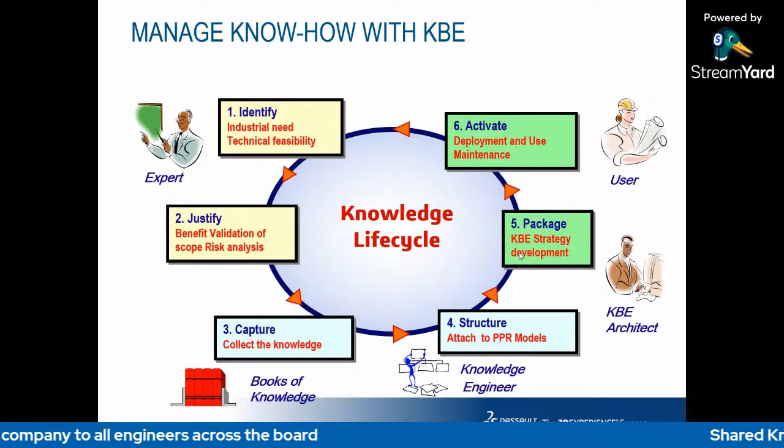Then the next step is to collect the important knowledge from related sources. The knowledge engineer then attaches the know-how to the PPR model and knowledge-based engineering architecture to strategize the development. And then the knowledge or know-how is able to be deployed, used, and maintained depending on the requirements by the company or the customer. Both processes are covered under knowledge-based engineering.

All right, so next, we move to the industry challenges and pains. So these are the typical pains and challenges faced by company or industry.

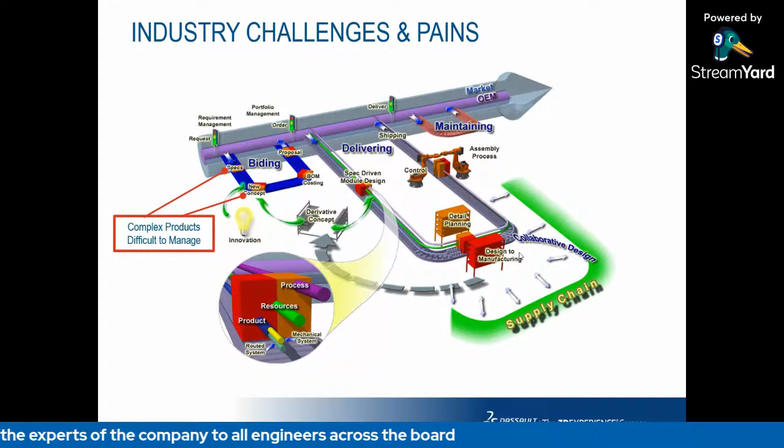Complex products are difficult to manage due to lack of information from suppliers. Then frequent change of requirements from suppliers. And then the necessity to rework the design due to errors and bad working methodology.

Long design time due to non-automated process. Frequent schedule violation due to the bad reactivity of supply chain. The right minimum information to exchange or share with the supplier is not identified internally because of delay due to incompetency of resources.

Low quality products could be due to workers not following the design rule or company policy. And then, last but not least, high maintenance costs because of implicit know-how or lack of competent human resources, badly documented maintenance procedures, and so on.

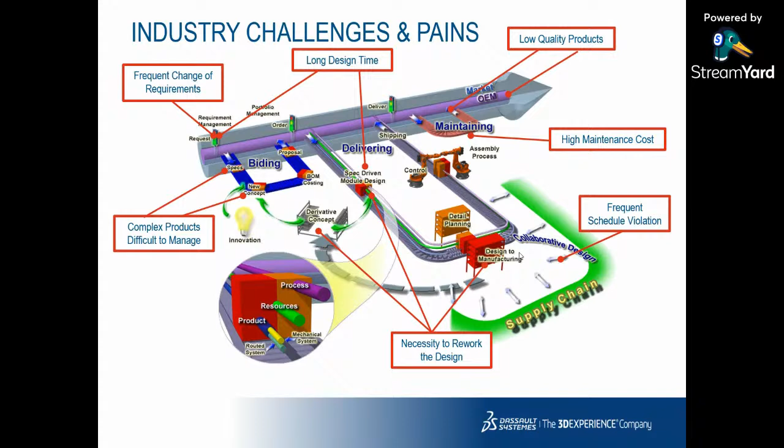All right, so next, knowledge ware values and benefits. So how, in order to cure all the pains just now, the company has to set up an environment favoring innovation and in the meantime automating and increasing the security of low value added tasks.

This will be the result after the know-how automation is implemented in this company. So, complex products difficult to manage: no proliferation of products and process thanks to unified working methodology.

Then frequent change of requirements: capitalized strategic knowledge takes into account explicit and tacit knowledge, then enables reacting quickly to any requirement change. Thanks to PDM links and the associativity of design, the changes are propagated automatically.

Then a necessity to rework the design can be cured by streamlined product development, because working methodology is enforced, so the quality of design is guaranteed.

Long design time: performance is increased because the processes are automatized according to the best methodology. The right knowledge is shared among identified communities, and the products and processes are optimized.

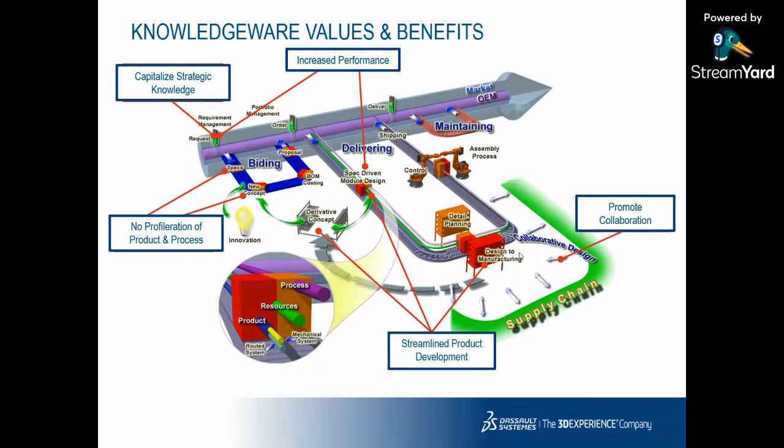Next, frequent schedule violation: the employees and suppliers collaborate on the basis of shared knowledge. They are more satisfied by their work since they have less repetitive tasks.

Then, low quality products is improved since the product variation is well documented and managed as well as the process know-how. The application of the best working methodology is enforced.

High maintenance costs is reduced. The management of knowledge harnesses the collaborative power of the company, and finally stimulates revenue growth. Innovation is sped up.

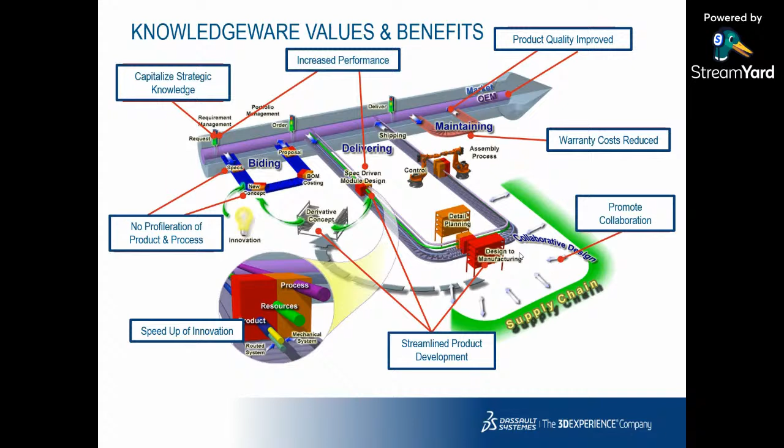Alright, so next, knowledge ware concept. This is basically the package to implement knowledge ware. Knowledge ware workbench in Catia consists of Knowledge Advisor, Knowledge Expert, Product Engineering Optimizer, Product Knowledge Template, and Business Process Knowledge Template.

So the Catia V5 products to capture know-how, for today's webinar, I will be focusing only on two products, which are Knowledge Advisor, KWA, and Product Knowledge Template, PKT. The Catia V5 product to capture know-how is Knowledge Advisor, or the acronym is KWA.

This workbench provides three fundamental functions, which are rules, checks, and reactions. These functions allow integrating know-how using the knowledge-ware language and optimizing them in order to facilitate technical decisions, reduce errors, and automate design for maximum productivity.

And then the Catia V5 product used to create user-specific features is Product Knowledge Template, or PKT. This product allows creating user-defined features, or UDF, which is a new parametric feature based on a structure composed with existing features like pad, groove, hole, sweep, etc., or document template, which is part of product startup files, which could be adaptive to a geometrical context.

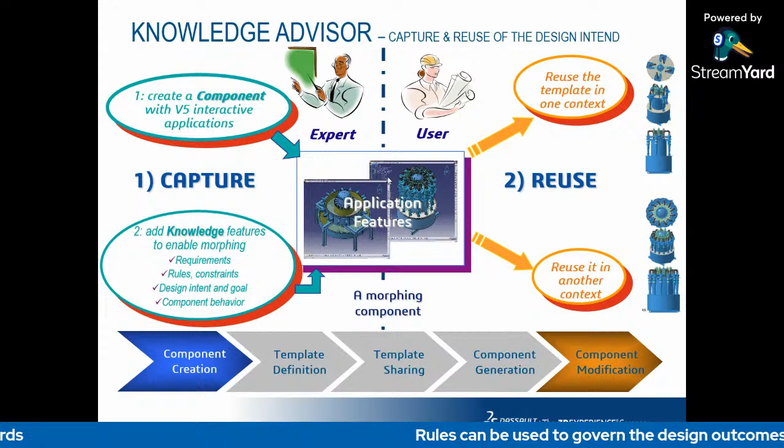And then the user can reuse those designs directly afterwards and change its specification or parameters based on the design requirement.

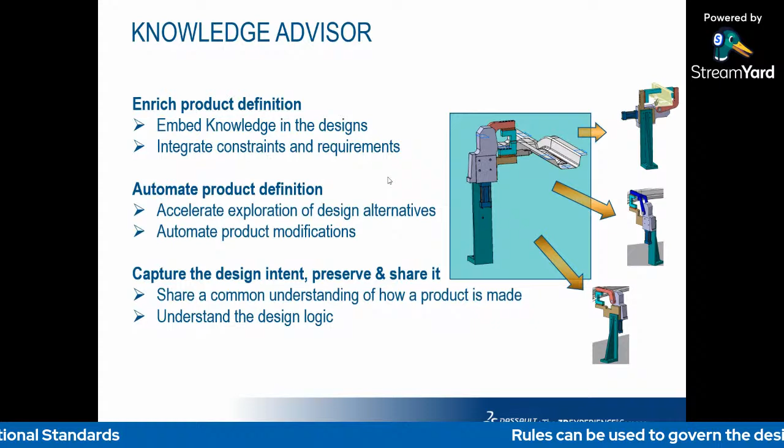Knowledge Advisor is a CATIA product which allows the user to embed knowledge within design and leverage it to assist in engineering decisions in order to reduce errors or automate design for maximum productivity. So for example, in this case, the jigs and fixtures, instead of spending time designing multiple jigs, we can create one template, save it in the library, and change the parameters based on our product specifications.

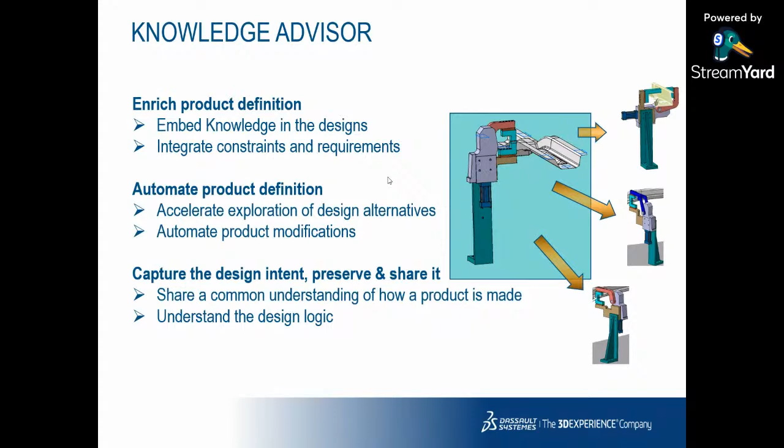So this is a case study on a tow hook assembly component. This customer, Maschio Gaspardo Group from Italy, is a leading global supplier for agricultural machinery, including its Maschio soil preparation machinery and Gaspardo, which is planting machines.

So they have at least two types of machine with different functions. One of the business challenges is to reuse existing designs to create more product options. So the objective of this project is for the product to be able to adapt itself to the environment.

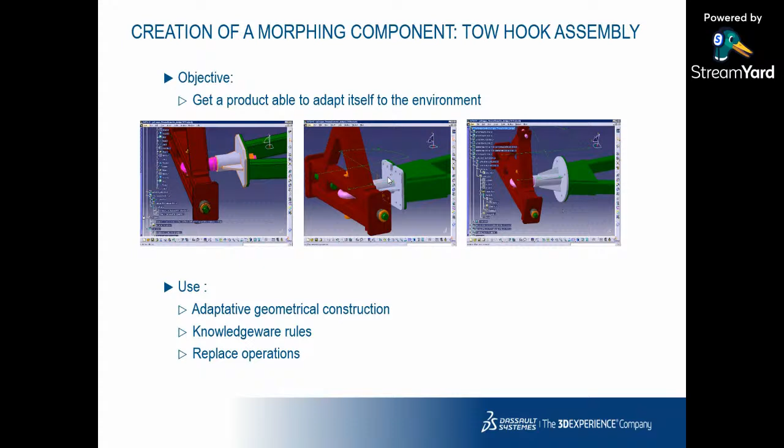In this project, they are using KNOWLEDGEWARE to design an adaptive geometrical construction. Then they create some KNOWLEDGEWARE rules. For example, if the tube length is more than 150 millimeters, the number of stiffeners will automatically be set to 4, as preset by the expert.

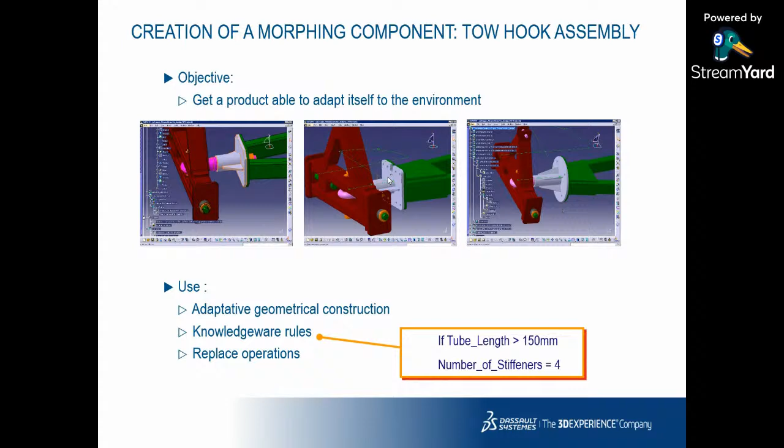And then, last but not least, they use the replace operation function. As a result, this KNOWLEDGEWARE is able to change the component parameters as well as change the component environment.

Alright, so next we move to the product knowledge template. Product knowledge template provides the ability to easily and interactively capture engineering know-how and methodology for highly efficient reuse, helping the organization to share best practices and avoid duplication of effort through the ability to reuse existing design. We will see how product knowledge template functions in this scenario.

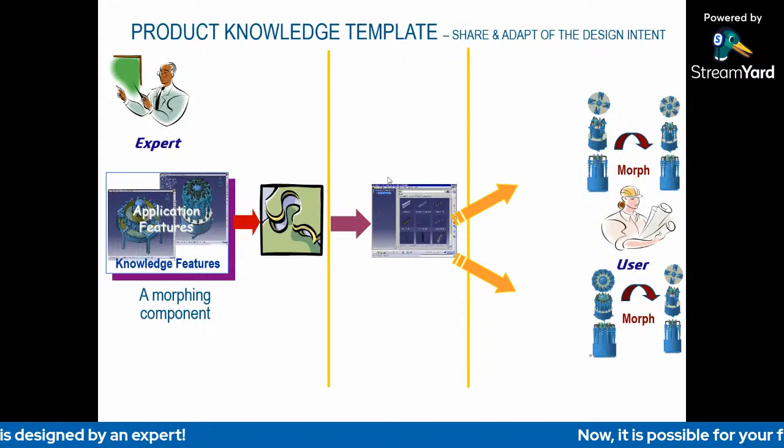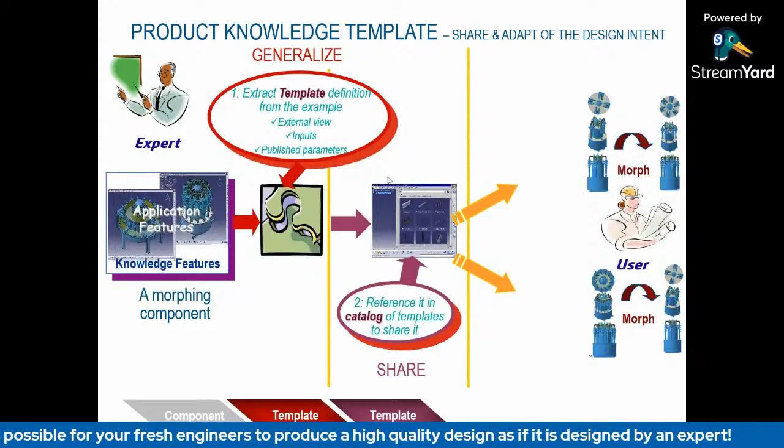So by using a product knowledge template, the expert can extract a set of features to define components, not only using application features, but also Knowledge Advisor features. Then the expert publishes those components and templates through a catalog.

And then he may also use a complete part or assembly as a component. And then the user can easily use and reuse those available components in his specific design.

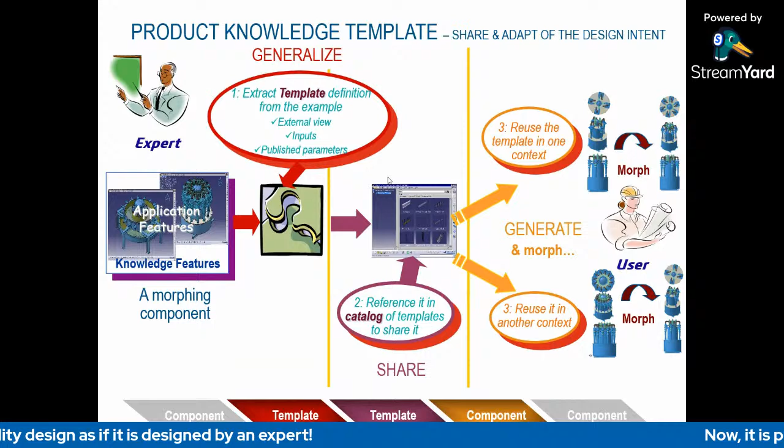And then part template - a part and its associated documents such as drawing, analysis, process to be reused inside products. Once instantiated, the part is duplicated and you can get an independent component. So both part and assembly templates are templates that work at the part or at assembly level.

Next, power copy is a template that is created from a set of features designed interactively in order to be reused in the design of another part. It allows inclusion of all kinds of geometric elements, but also KNOWLEDGEWARE features to add more intelligent behavior, such as parameters, formula, design tables, rules, and so on.

Only the main parameters are made accessible for use. The power copy can be saved in a CATIA catalog to make it available for all designers.

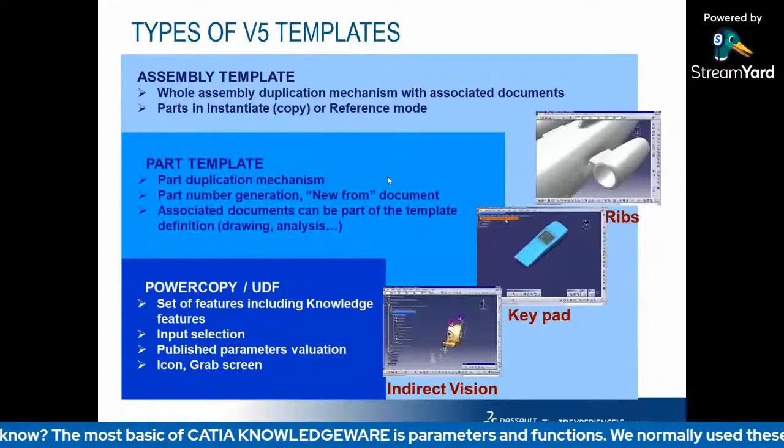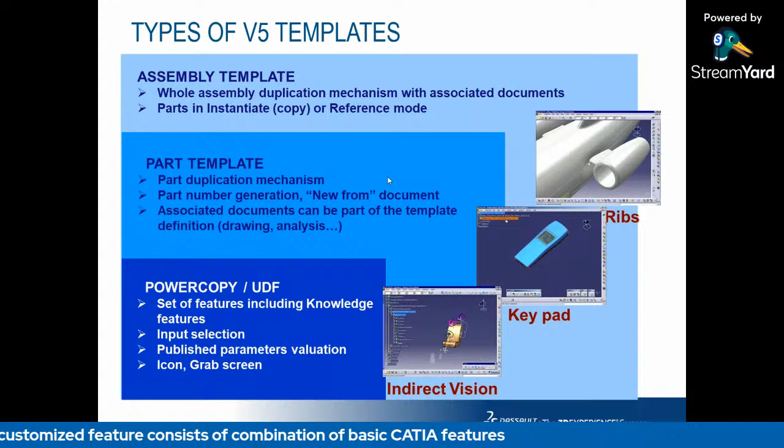Next, user-defined feature or UDF is a template that works at the part level. From a collection of features like geometry, literals, formulas, constraints, and so on, you can create your own feature. The result is a part design feature or shape design feature that can be reused in the design of another part. The created feature can be saved in a catalog.

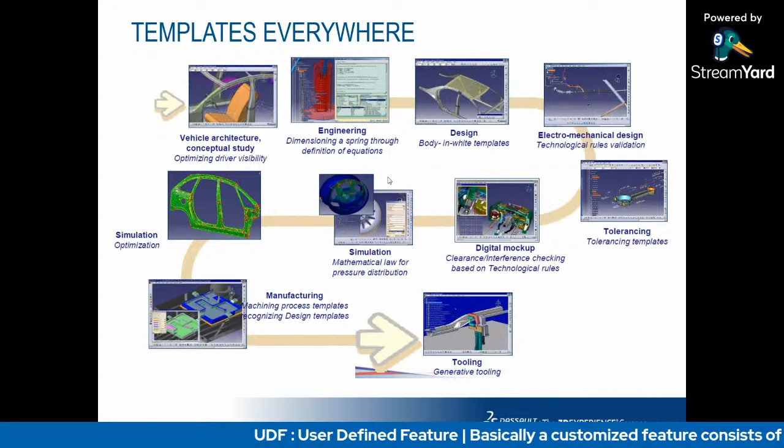So templates are applicable anywhere, not only limited to design process, but also in conceptual study, ergonomics, tolerancing, digital mockup, simulation, manufacturing, and up to tooling. And templates can also be applied in many fields of industries such as automotive industry, aerospace, fabrication, electronics and electrical, shipbuilding, consumer goods, and many more.

Alright, so advantage of templates. Full interactive approach - any morphing template can be completely defined with the V5 interactive application and the KNOWLEDGEWARE products. Natural solution and incremental solution - the templates usually start from an example that is generalized. The template can easily be enriched and modified after several times.

And the templates can be used as a generative approach. The end user can quickly generate a new component by reusing the template, simply clicking on the inputs and entering parameter values.

And then last but not least, the generated geometric component is still alive. All the knowledge that led to the template extension belongs to the resulting model. If the context is changed, the resulting model will morph. The resulting model can evolve separately from the original component.

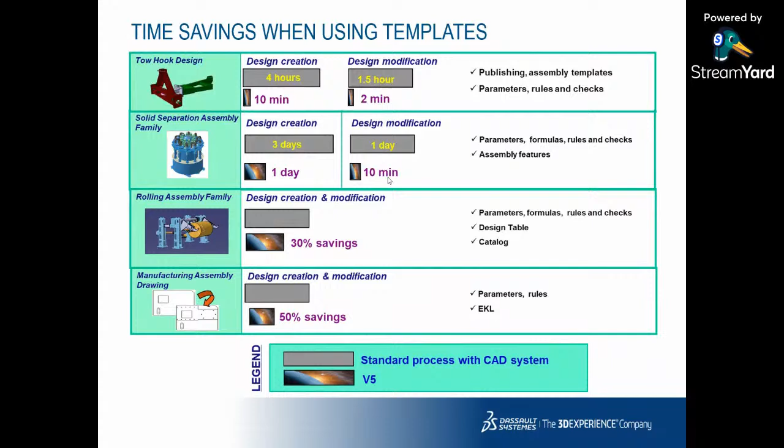Right, so next we go to customer testimony. First, testimony from Peugeot Citroen PSA.

The next we have Audi, most likely similar to Peugeot: intelligent master power copy for tooling flange heels, then rules generate design and propagate changes, automated validation process, and interactive and easy to use system.

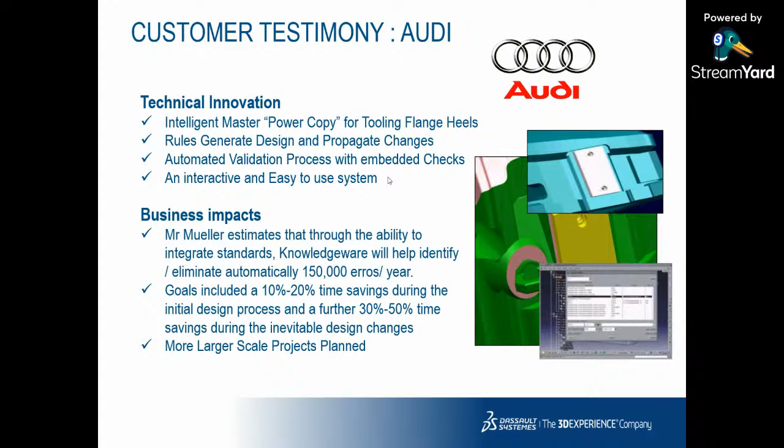Mr. Mueller, the CEO, estimates that through the ability to integrate standards, KNOWLEDGEWARE will help identify or eliminate automatically 150,000 errors per year. Goals included a 10% to 20% time saving during the initial design process, and a further 30% to 50% time savings during the inevitable design changes. More larger scale projects were planned.

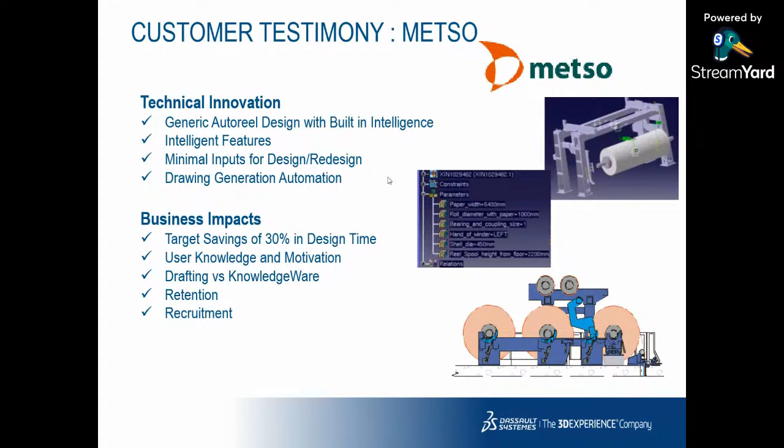Okay, next we have Homag, I will just go through this. We have some more customer testimony from Krebs, which is industrial equipment in hydrocyclone design and manufacturing. Then we have Metso, industrial machinery for paper. And then namely Chrysler, Valeo, automotive.

So in summary of the customer testimonials, you can see that all of them experienced positive feedback, which is that the time spent for design will reduce dramatically, meeting one of the KNOWLEDGEWARE objectives of cost and time saving.

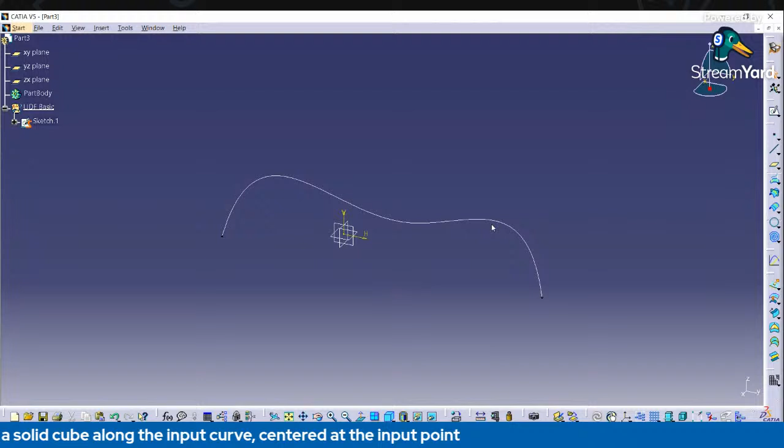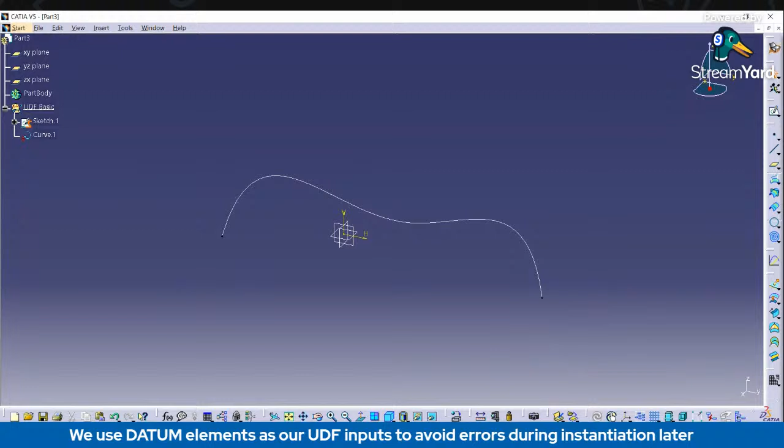The most important thing in UDF is that our input must be a datum element. We use datum elements as our UDF input to avoid errors during instantiation later. So I'm going to disassemble this sketch, domains only. After converting the sketch to a datum element using disassemble, we can delete this sketch since I will not use it anymore.

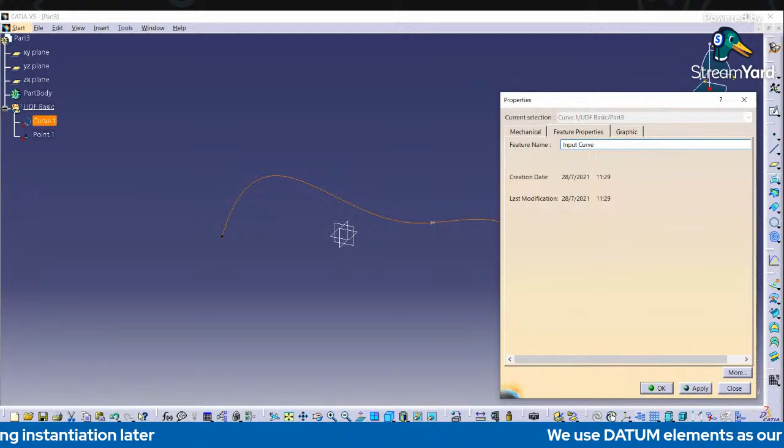Then I will create a second datum element, a point datum element, on any place, using the isolate process. So I will have two datum elements here. I will rename this as input curve, and this will be my input point. So this is our first step in UDF: I have input curve and input point.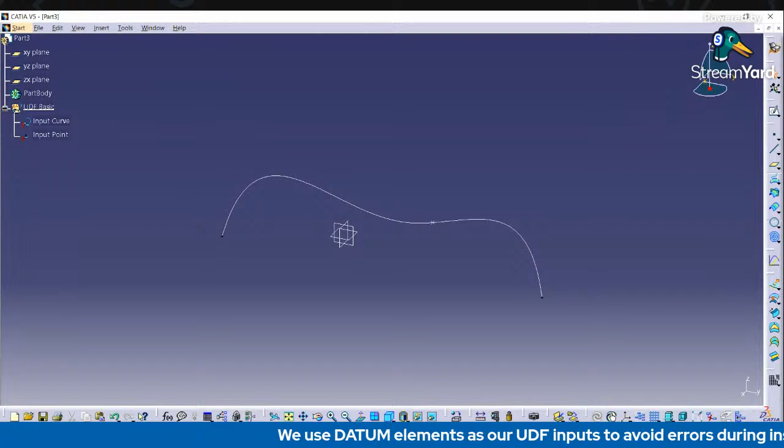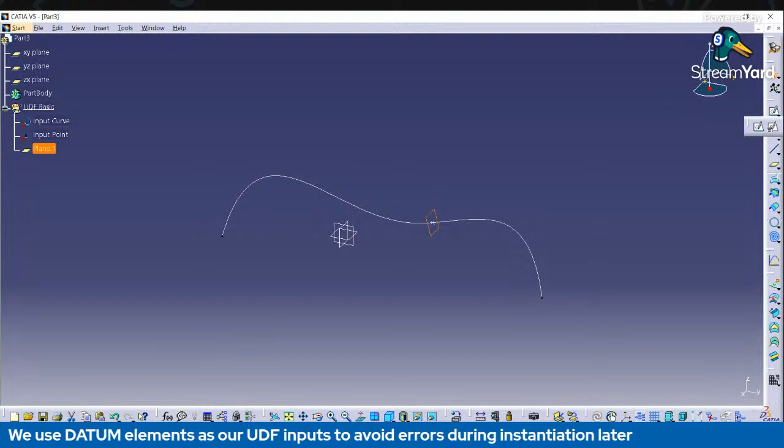Second, I will create a plane normal to the curve, with a point on the input point. Then I will make a sketch, using position sketch, position plane 1, and this one projection point for origin type. For example, I want to create a square.

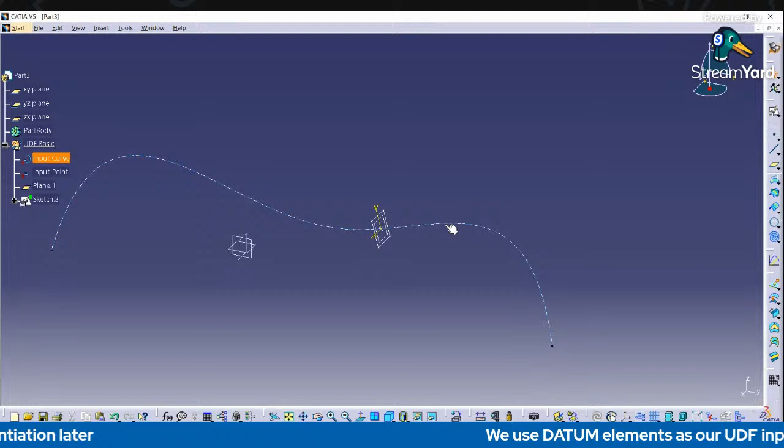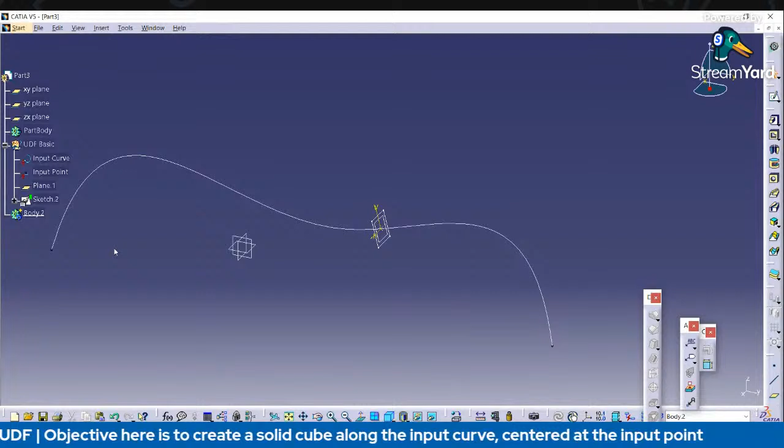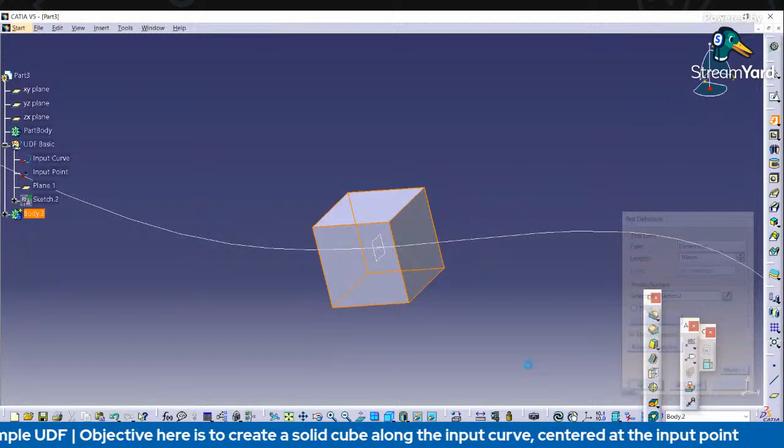Exit sketch, so now I will have sketch, curve, and point. Then I will pad this sketch using part design. First I will insert a body, and then I will pad the square to a cube, mirrored extent, 10, preview. This cube will be my UDF output.

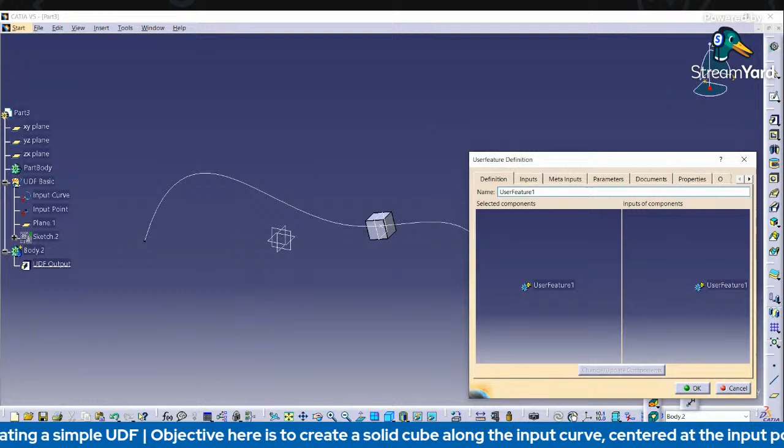So for the third process in UDF, I want to change this part body to UDF. So I will go to insert, knowledge template, user features, and then I will rename this as Cube UDF.

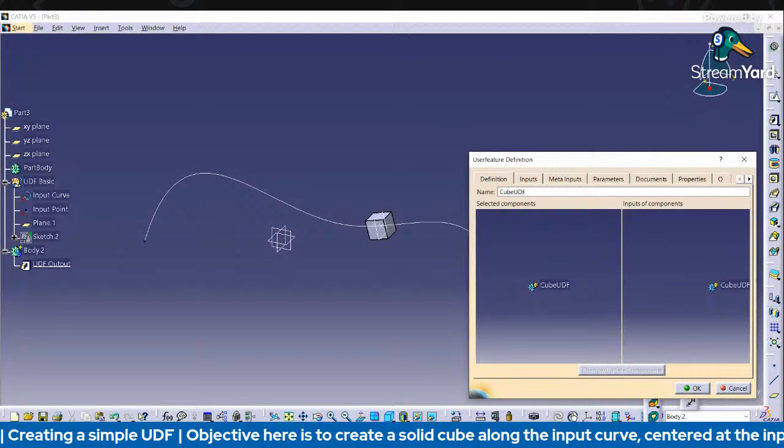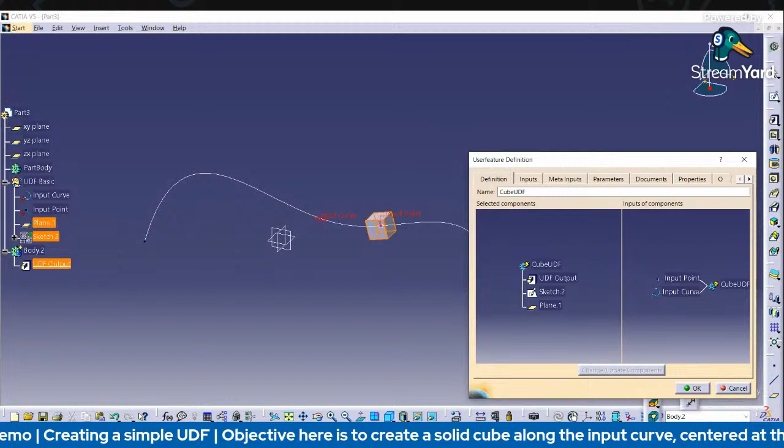So I will select this tree from bottom to upper until our datum element, for example UDF output, and then I select sketch and plane. The objective of this is to make sure all of our inputs refer to datum element, for example input point and input curve.

Okay, so I can hide this, and this, and this. Okay, I will have my Cube UDF, and for example, sorry, so for example we're going to have...

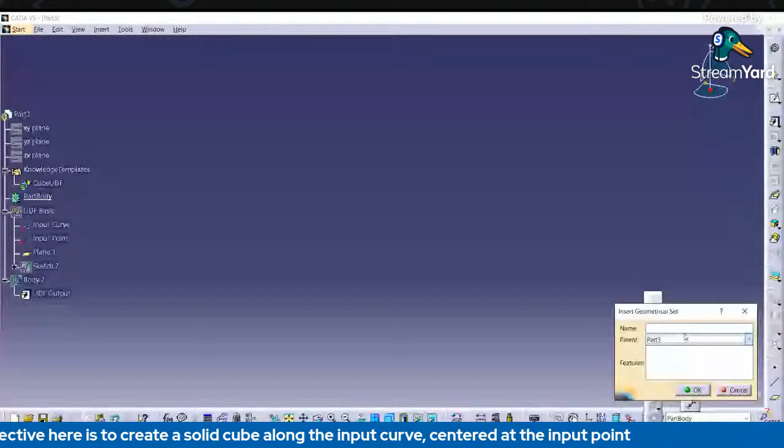We get a design requirement from customers. So this one is going to be the design requirement.

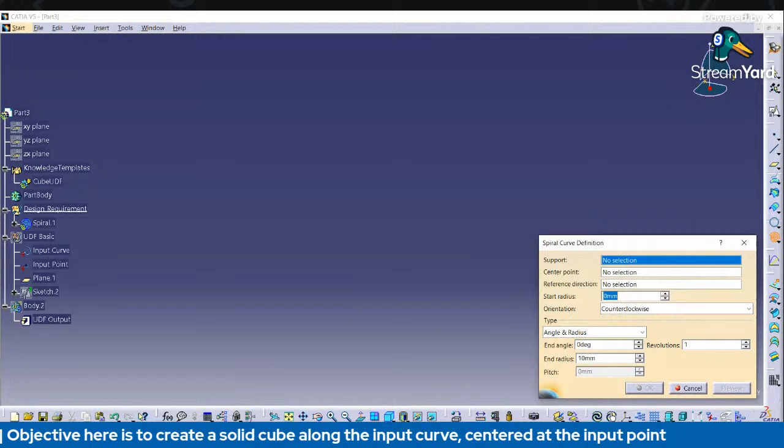And then, for example, I got a spiral pattern. So support is going to be XY, center point going to be coordinate 0,0, and reference direction going to be on the Y component. Let me make this bigger.

Okay, this is an example of design requirement. It has 2 points, one point here and a second point here.

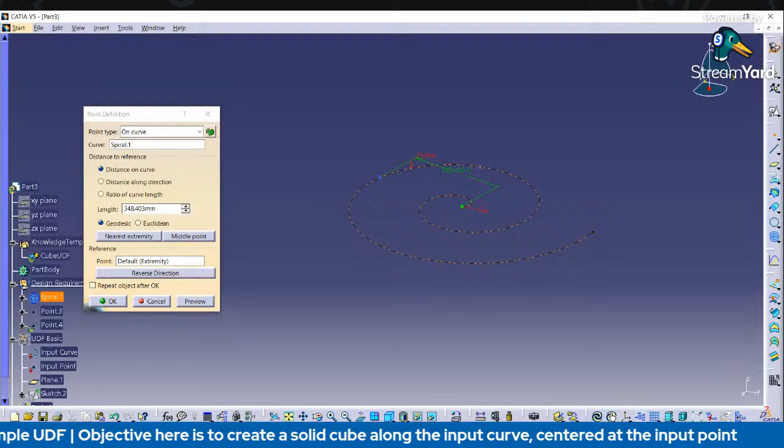Okay, now I will instantiate this Cube UDF.

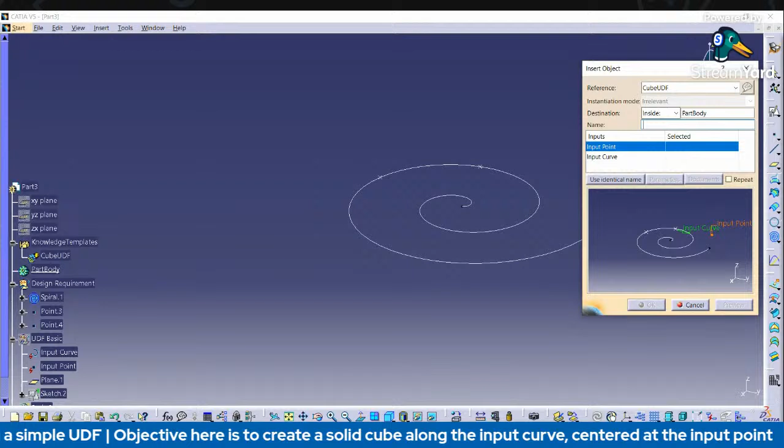After we define the UDF, we can try it out. Notice that each and every time the UDF is instantiated, the solid cube is created easily following the process defined earlier. So for example, this is my first input point, and the spiral is going to be my input curve.

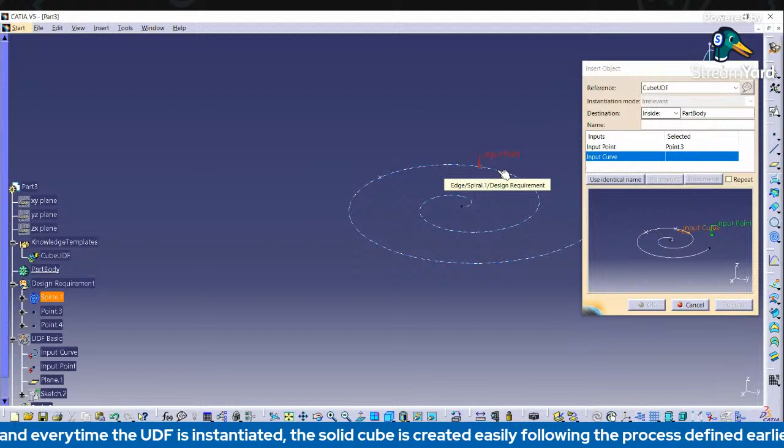Preview. Okay, and second Cube UDF, initiate this point and spiral input curve. As you can see, the orientation of this cube will follow normal to curve.

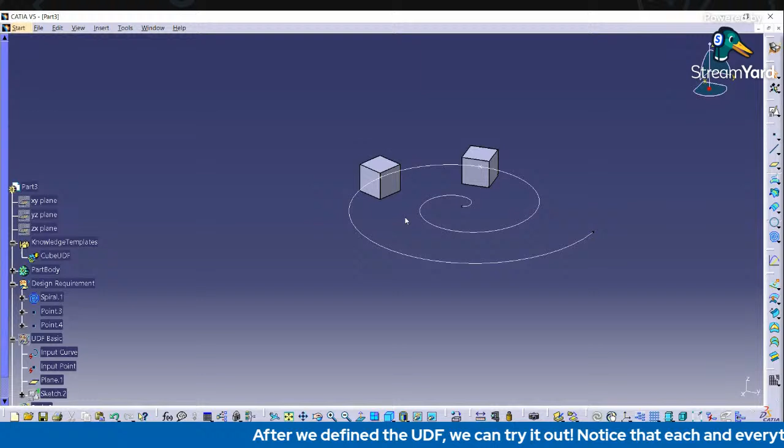So this is the concept for UDF. UDF's benefit is to maintain intellectual property because UDF doesn't show the history of how we produce the solid cube. If you want to share the process with others, you can use PowerCopy instead, using the same process.

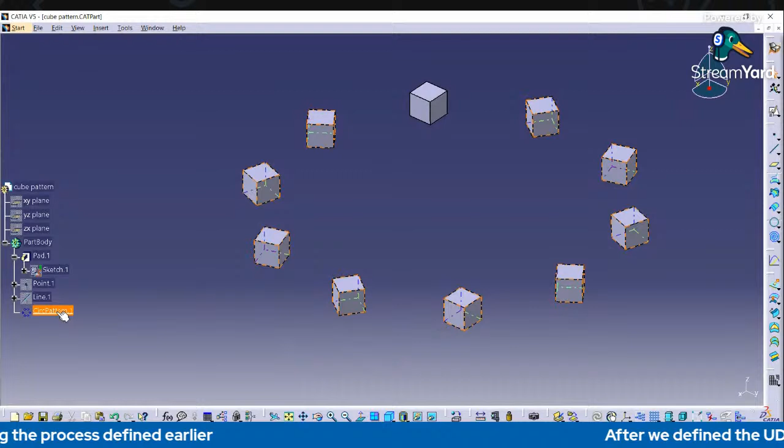So what's the difference between UDF and pattern? With pattern, you will not get the cube on the same orientation. This is an example of creating a cube using the circle pattern. So with the circle pattern, the orientation of each cube is different, as you can see.

So that's for the first demo. And for the last demo, the objective here is to automate a wall design and assembly through the same process as before, with additional configuration. CATIA will automatically create wall panels accordingly, positioned correctly, with a controlled configuration.

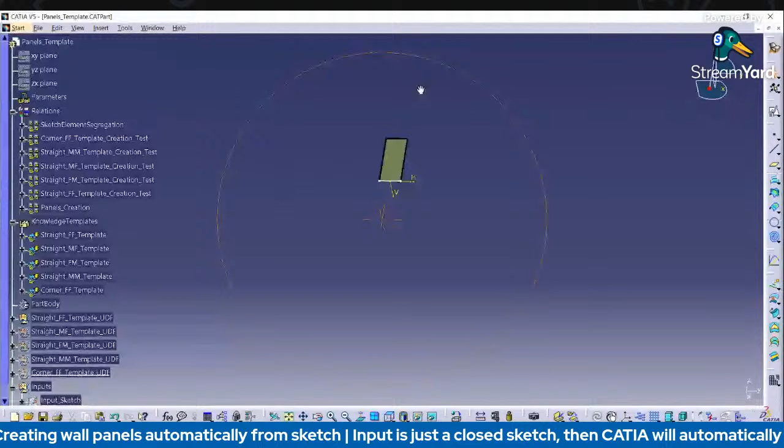For example, I have this, 5 examples of wall panel. So this one, the first one, is for the first example of the wall panel.

As you can see, the connection here, and for the second example, I have this connection. And for the third type, I'm going to have both connections on a V shape, as you can see here.

So I will create, for example, if I have a design requirement here to create a wall panel, I can easily use this sketch input. We'll create a new sketch input, so for example, any design that I get...

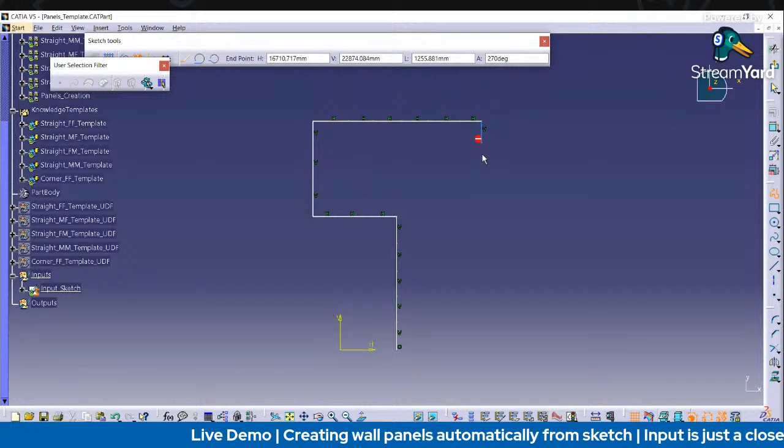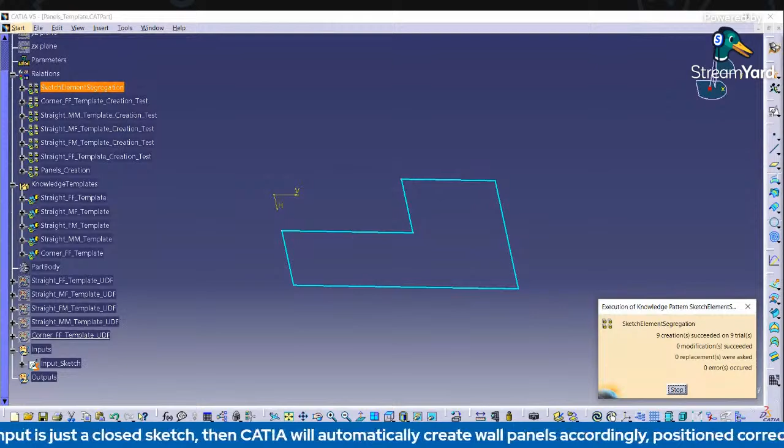Okay, this is an example of design requirement from customers. Easy. So using sketch element segregation like before, I can create it easily and execute it. So what it will do...

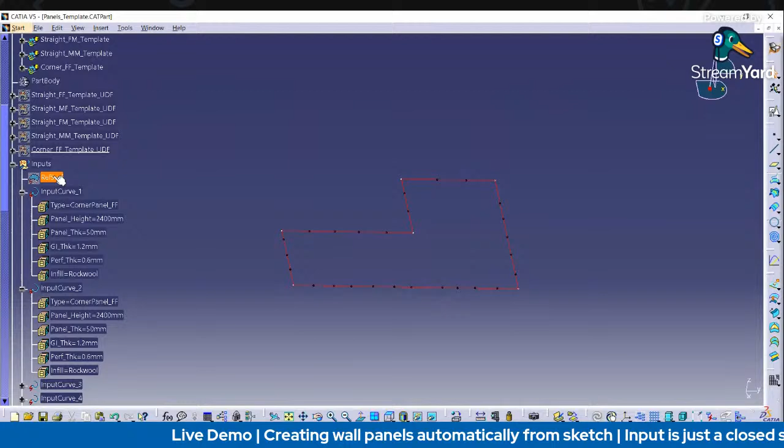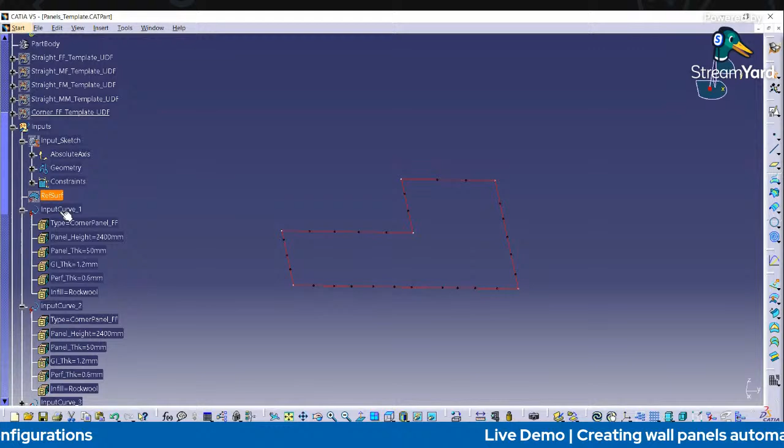We'll delete this again, and I will create another pattern.

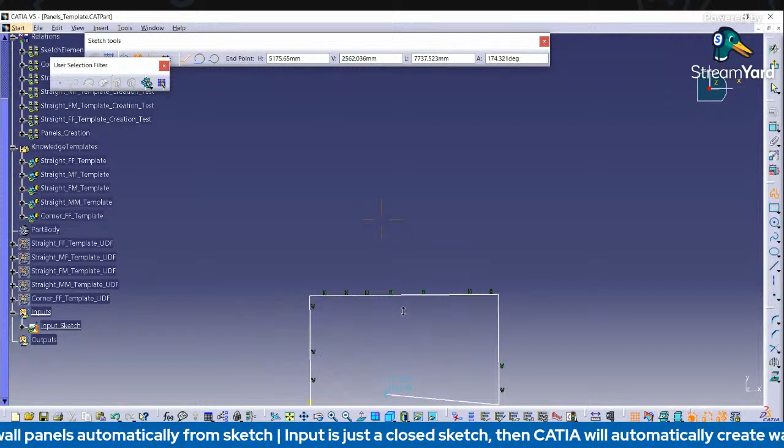Zain, yep, I think your view is too far. As you can see, the segmentation length is very large. Maybe you can resketch the whole thing again and check the sketch tools, the length is quite large. Okay, sorry, try to start again. Alright, thank you.

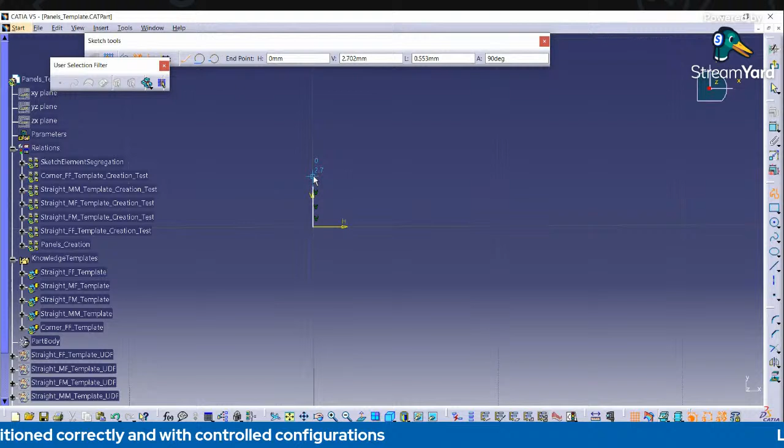And that is too small. Maybe you can make a line at the range between 200 mm and below 1000 mm. Okay, guys.

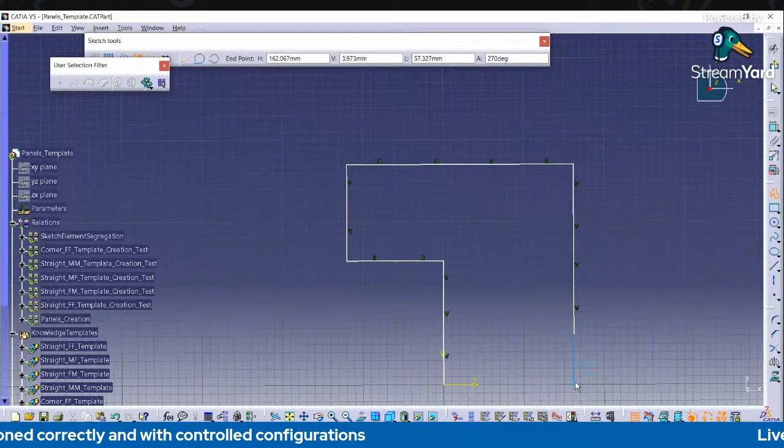Okay, this is an example of my user requirement, sorry.

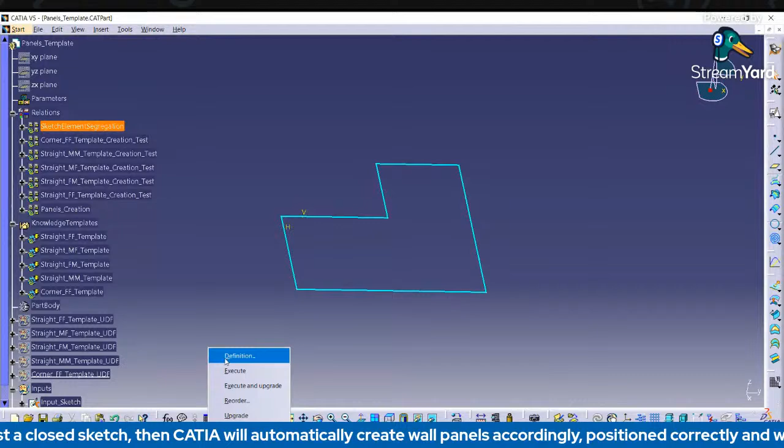And then CATIA will automatically create a surface using each line that I've created, and then I will go to panel creation and execute this panel creation program. So execute, what it will do is automatically create a wall panel, using this rule.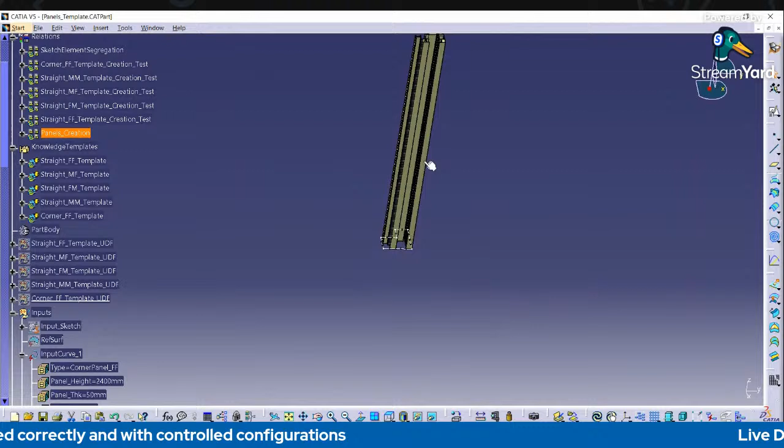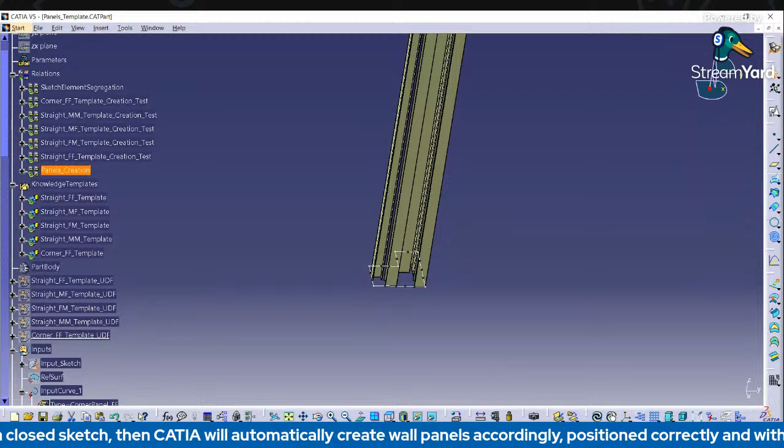As you can see, my design is too small. So as you can see here, it will automatically create a sketch. So the input is just a sketch, and then CATIA will automatically create a wall panel accordingly and position it correctly using each line, with control configuration.

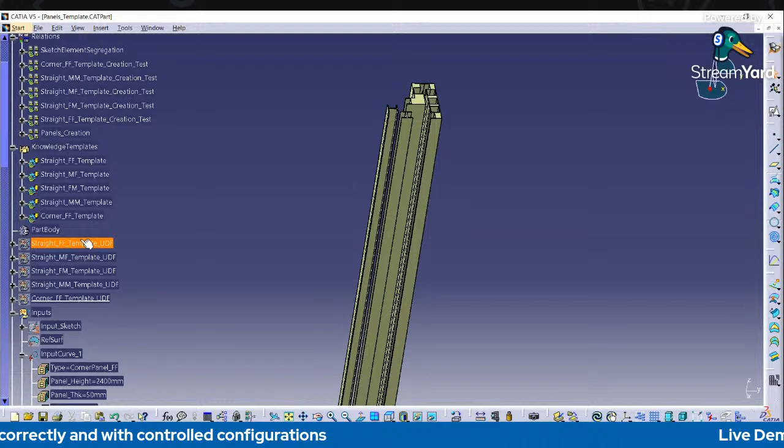So, conclusion for automation is to reduce time consumption for creating each panel and assembling it.

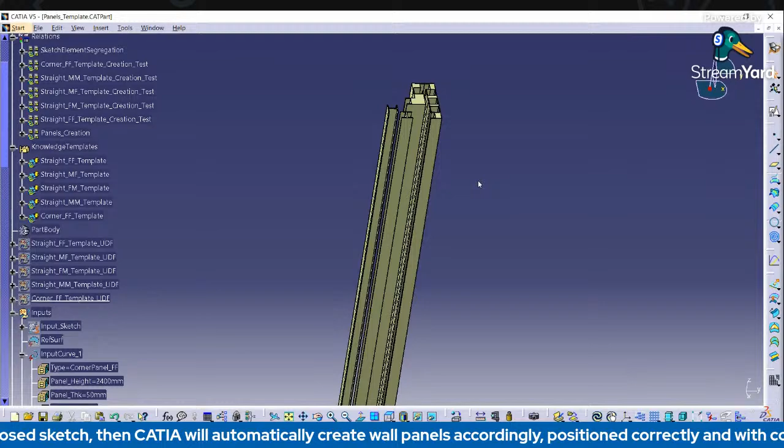Thank you, Zain. I think there was some problem with the sketch earlier, right, Zain? Yep, so the sketch that you used is too small for the model to come up properly, but it's okay.

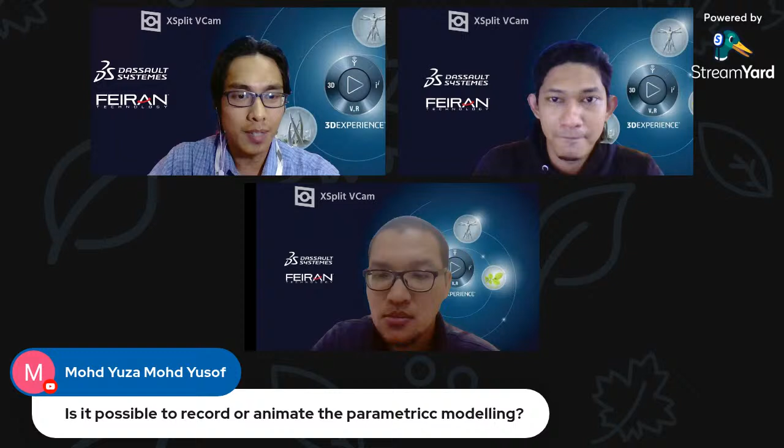Okay, is it possible to record or animate the parametric modeling? Okay, I need to digest this and try to understand this in context. To record or animate. Let's see.

If they animate, by the term animate here, in regards to we can see the propagation of the 3D products from bottom, and then it adds materials slowly towards the top part. I don't think it is capable of doing that, Mr. User. But if you're saying if we can animate the parametric modeling, I'm focusing on what Zain demonstrated earlier with the wall panel. So if you're saying if we can animate the wall panel creation from one section and then finish this one section, we can see the wall panel, and then it proceeds to the next section, complete with one panel, following all the sections until we complete the whole sketch area, then it is possible controlling that inside our script.

And for recording purposes, for every CATIA feature, we have a record feature. We have a record video feature. So you can record the video and replay it anywhere you like. By default, if I'm not mistaken, the video format output will be in .avi format. Okay, there's a clarification on record, I think.

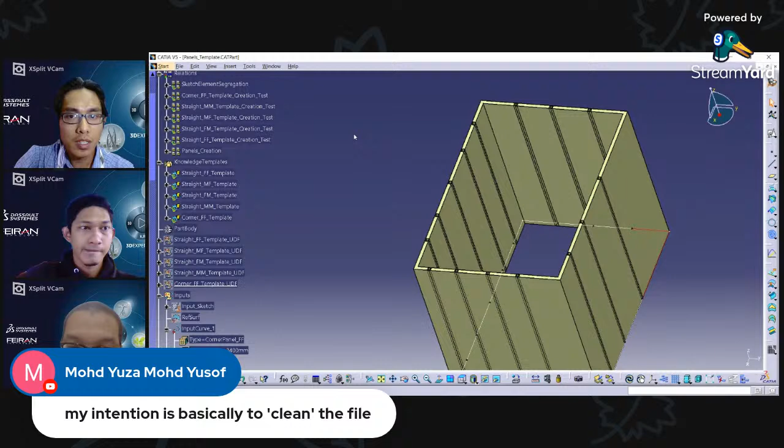Okay, maybe you can open a new CATPart. Right. Wait, the new CAD. Okay, let's see in the tools menu.

Do you see any delete unused elements there? Unused element... delete useless, or delete unused useless element? That is right. So, Mr. User, in Part Design Workbench, if you go to the Tools menu, you will see there is a function that came out-of-the-box with CATIA, called delete... what is it called, Zain? I cannot see it. Delete useless element. Useless, right? Okay, not unused. So my memory serves me correctly.

Delete useless elements. So once you click on that function, try to click it, Zain. There will be a dialog box that comes up. Okay, there is nothing here. So maybe you can try to create a sketch.

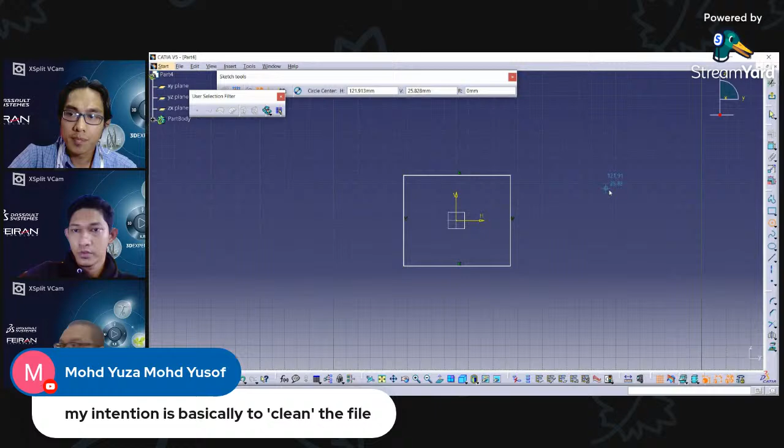In fact, create two sketches... two separate sketches, I mean. Okay, create another sketch, in the same part body, Zain. In the same body, alright. Yeah, just two different sketches.

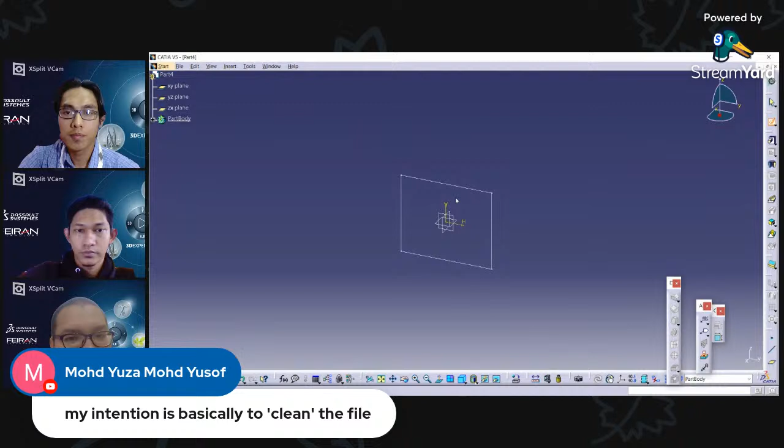Alright, so now from the second sketch, you pad a simple solid from the second sketch. From the second sketch, okay, create a pad. Yeah, that's okay. Okay, now try to use the delete useless element.

Okay, see there is a prompt dialog box given by CATIA. So here you can choose which feature you want to delete, and from this dialog box you will know which feature is not used and which feature is used by other features. I hope this answered the question earlier by Mr. Yuza. By this function, you can definitely clean up your specification tree from all the garbage lying around in the tree. Okay.

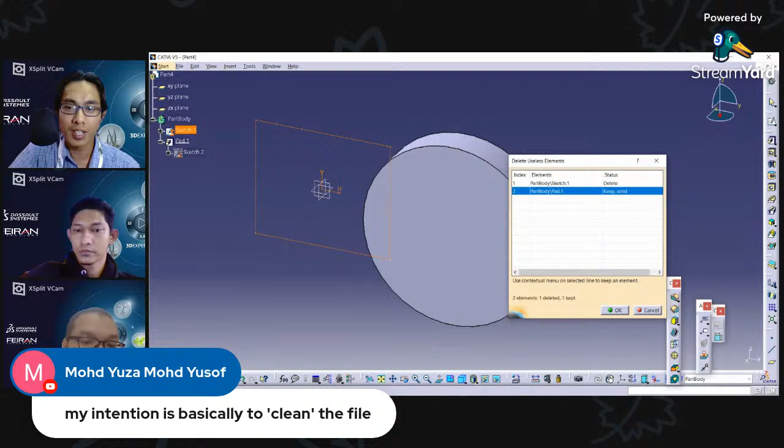Alright, we have a confirmation from Frieza. Great, okay. Let me quickly browse back the comment area and see whether we missed anything. I think we have covered every question here.

We have feedback from Nora Malina Fakri. Okay, we answered that question as well. So I don't see any new questions coming in from our comment area. I think we've covered all the questions given, and it looks like we've exceeded our time. So for those of you viewing this live webinar in recorded format, you can definitely interact with us later. You can submit your questions in the comment area. We will still actively recheck this recording after this session finishes and see whether we can answer any future questions related to this topic.

Okay, before we wrap up, Shimi, Zaim, do you have any more things to add?

No, Iskandar. No, Iskandar, thank you for the help.